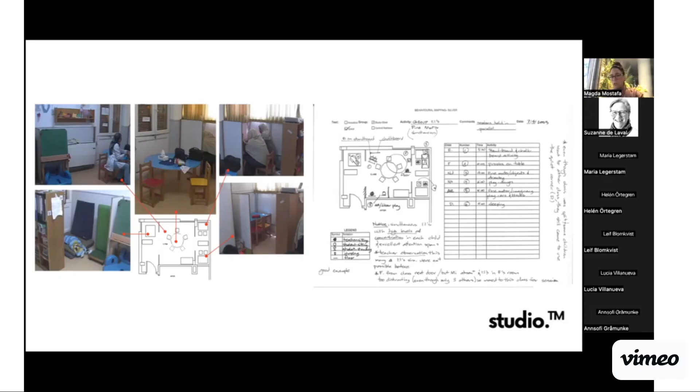And then we embarked on a year of coding their behavior in space and mapping their behavior in space in a very specific, broken-down kind of way, so that we were taking their tasks and breaking them down into vignettes of 20 minutes of observation at a time, recording their movement and the experiences that they were having throughout the classroom.

All of this was organized in what we called the sensory design matrix, which took the architectural attributes of proportion, scale, symmetry, color, lighting, acoustics, proximity, sequence—all of these ideas of architectural qualities—and tried to map them against our sensory inputs.

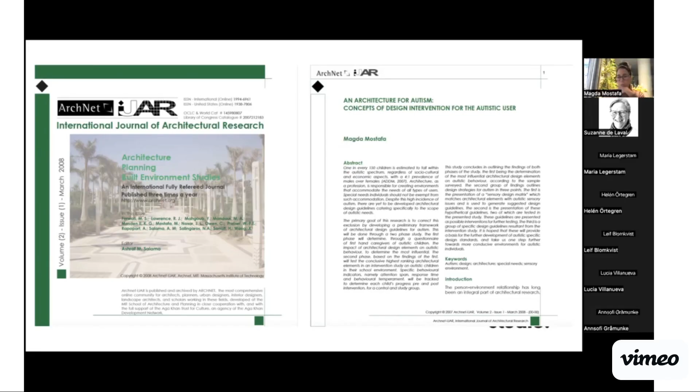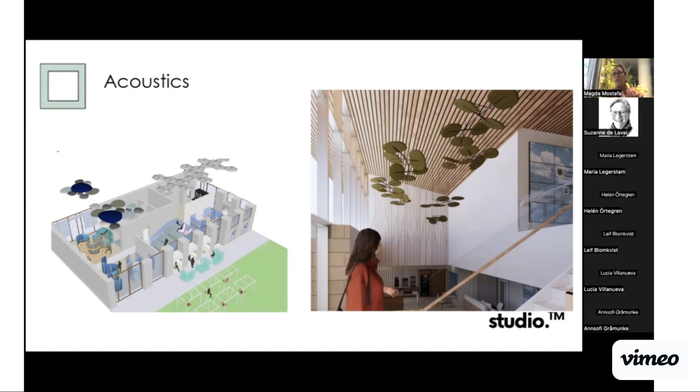One example is this image on the right, which is the lobby of a healthcare space I'm currently designing in the United States for an autism healthcare and research center. The ceiling-mounted installation above uses materials designed specifically not just to remove all sound from the space, but to allow intelligibility—masking high and low frequencies while allowing the frequency of voice. The idea is to create an environment that's intelligible, so when you enter a hospital environment, you're not overwhelmed by noise, and you're still able to hear, have conversation, and listen to instruction.

The next principle is spatial sequencing. This asks us as designers to break down and analyze the behavior and unfolding narrative of people's movement in space, thinking of it almost like a movie or story unfolding within the space. Then we design spaces and their sequence to parallel and mirror that narrative, so that as you move through the space, you're not moving abruptly through experiences, but in a sequenced, logical way aligned with how you're intended to use the space.

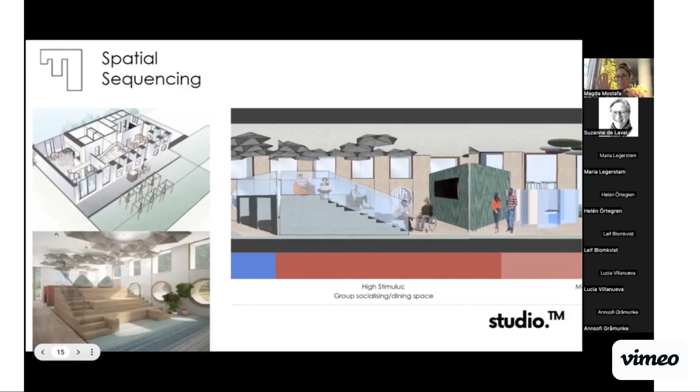That short clip I showed you is actually the spatial sequencing of an autism-friendly student center we were involved in designing at Dublin City University. I see some people on the call are from Ireland—Dublin City is the world's first designated autism-friendly university, and I had the privilege of creating a design guide for them.

This student center takes you from the central mall—it's on the ground floor of a student dorm being built there—from a mall that is very busy, loud, and overwhelming, through a transition space, into a series of spaces that mirror how students will move and experience that environment.

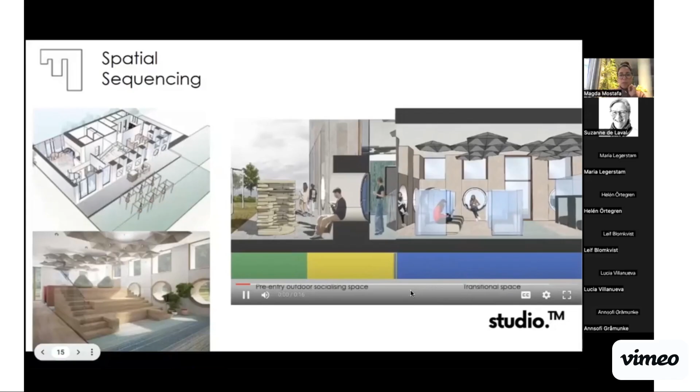The next concept in ASPECTSS is escape. I'm actually now revising that word because it may come with a negative connotation. But at the time, it was presented as a spatial opportunity to step away from a sensory overwhelming environment. I'll show you an example of what we've done with it and how we've researched its value. What I advocate for is to make sure that in all of our spaces, we allow for that experience, that moment to step away when you're overwhelmed.

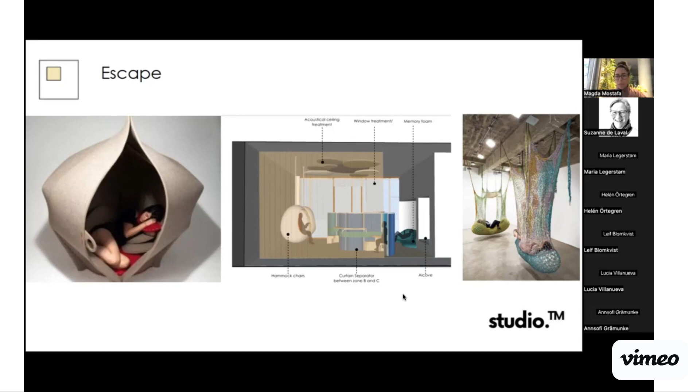And to create this spatial infrastructure for that to happen. I know we're focusing today on schools, but I'm finding this can be particularly impactful in healthcare environments, especially when embedded into wayfinding systems, because one shocking statistic is that the level of healthcare autistic individuals have access to is significantly lower than their peers, not because we don't want to care for them, but because of the lack of access to these healthcare spaces and the barriers they create.

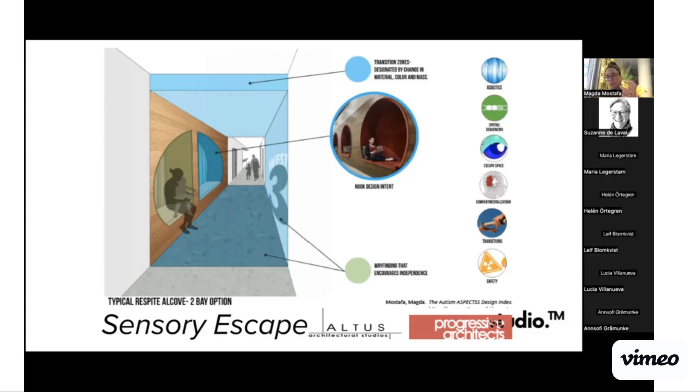One of the most important barriers research has shown us is the physical environment itself. Autistic individuals will delay care and delay a visit to a hospital because of how the physical environment of our hospitals is set up, and that delay of care will have an impact on their health. There are shocking numbers to support that claim. So one of the things I'm exploring in my work is embedding these escape spaces as part of wayfinding strategies, and the same could be applied in school environments as well.

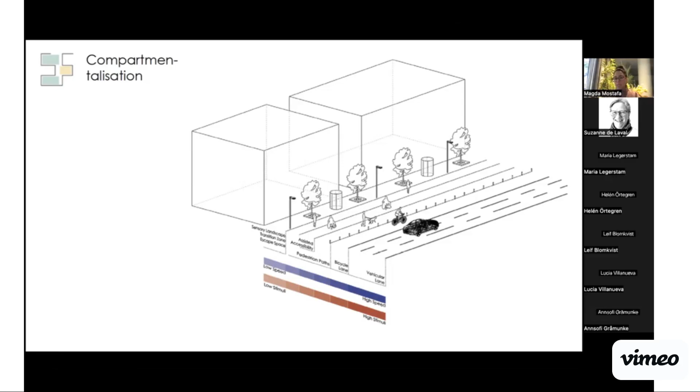The next concept is compartmentalization, which is similar to zoning in that it asks us to organize space, but into discrete compartments. Here is an example on a city street surrounding Dublin City University, with a proposal for a transition between the building line and the paving, with almost lanes of different speeds and sensory qualities in a gradient, going from low speed to high speed to mirror the low stimulus to high stimulus we see along any city street.

Compartmentalization can also be represented in the internal space of school environments. This is an image of a school for autistic students I was involved in designing at the Sharjah City for Humanitarian Services with Dar Al Omran and Mimar Group. Here we took this idea of compartmentalization even at a very small scale, so each activity—group work, one-on-one, individual work, the escape space, the teacher's workspace—had its own discrete corner or representation throughout the classroom environment, which was very important.

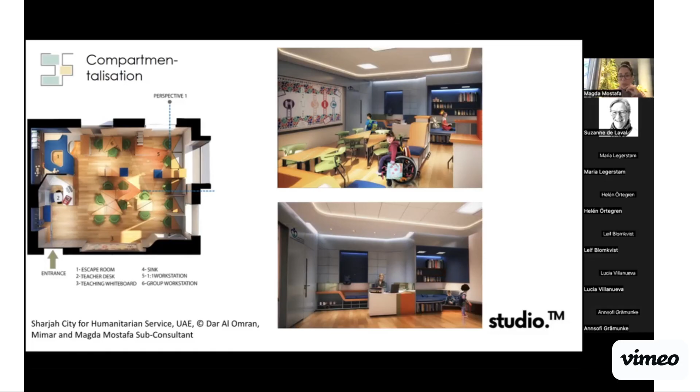The next principle is transition, which asks us to create the spatial infrastructure to allow for sensory regulation and readjustment. If you think of the autistic experience as possibly being one of constantly being bombarded with sensory input that isn't necessary for what you need to be productive in your space, then sometimes as you move from one experience to another, you're going to need a moment to adjust.

I think all of us can relate to this. When we arrive at a meeting or conference, very rushed and late, coming off a noisy train or walking through an overwhelming station, and then we have to immediately be ready to talk and converse and be brilliant in our work—sometimes you just need that moment to adjust, to go from a very sensory overwhelming experience to a very focused one. What ASPECTSS calls for is creating the spatial infrastructure for that to happen.

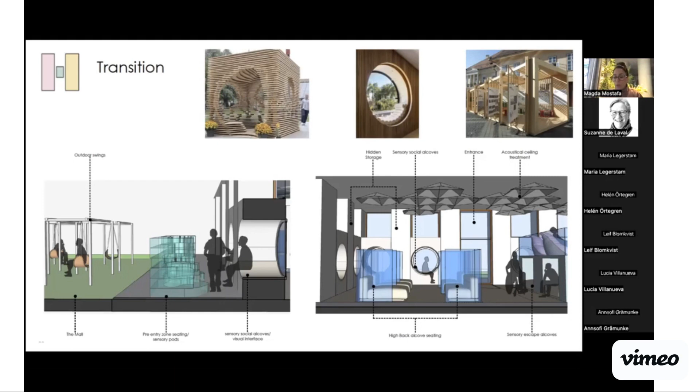It can be a small seat for someone to step away with a little bit of quiet. It can allow you to step away from the flow of people so you don't feel the burden of being in people's way and being a barrier. And it can take on very different forms.

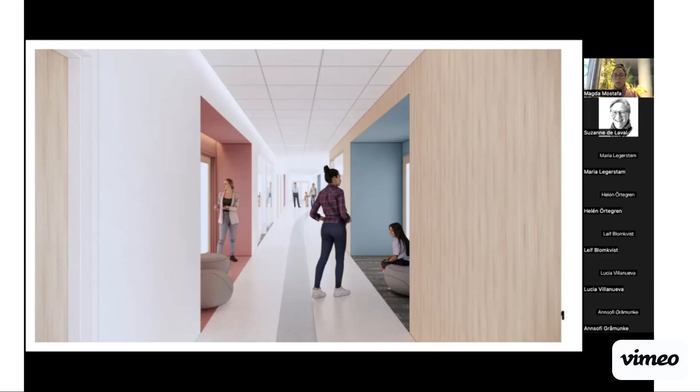This is another piece of work we did as part of a healthcare environment, but I include it here because it could just as easily be part of a school environment—creating alcoves of space where students or patients, as they move through a central corridor before their next activity, perhaps arriving from the playground and then going into a class for an exam, can have a moment to sit on a comfortable seat, with different lighting and carpeting where it's quieter, to readjust and sensory regulate before moving into that high focus, low stimulation experience. This can be tremendously helpful.

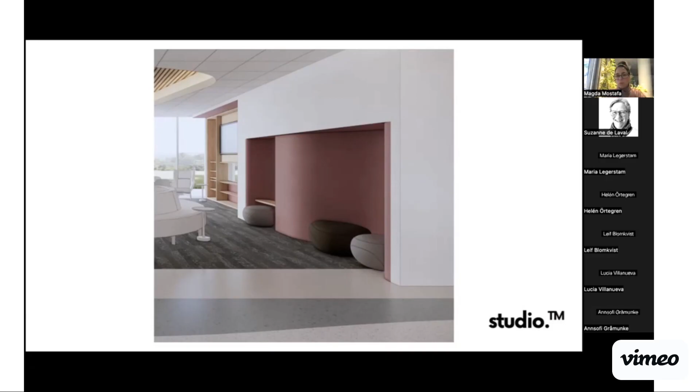And it could take on lots of different forms and colors. The next example is this idea of sensory zoning.

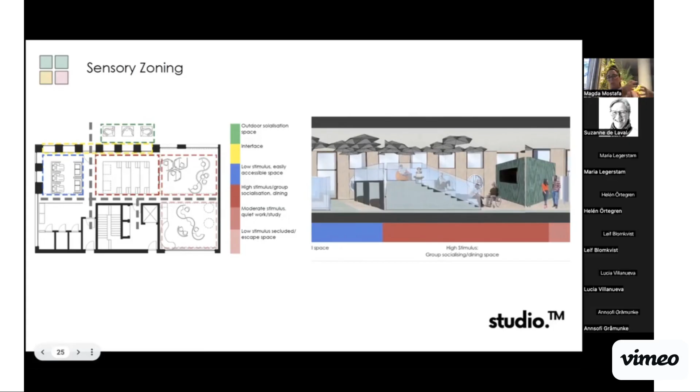Here you see the same video of the spatial sequencing, because in parallel to that spatial sequencing of movement from one activity to the next in a logical order, it must also be organized in a sensory order. Ideally, as architects, we're encouraged to think of spaces through the functional lens, doing functional zoning. I'm not asking us to abandon that utilitarian thinking, but asking us to layer on top of it an element of the sensory.

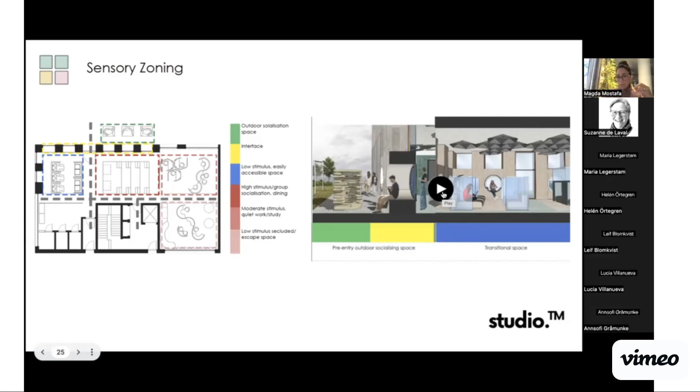Perhaps not all classrooms are the same. Some require high focus and low stimulation, while others are more engaging and stimulating, like music, drama, movement, and physical education. Those are high stimulation, while others are low stimulation. It's really important, in addition to all the other lenses of good design, to think through the lens of the sensory.

Elopement is a big challenge with some children on the spectrum. Elopement is students wanting to run away. The moment they see an open door, an open corridor, or an open sidewalk, they'll dash out very quickly, and that can be very dangerous. So the idea of safety, of course, can never be ignored.

I promised Suzanne today I would talk about the Autism Friendly University Design Guide, but the reason I present it here is because it's a really great example of how all of these principles come together in a practical and implemented way. At Dublin City University, we were invited to design a guide for them to think about their future spaces, and also to design three test cases that would take all of these principles and put them into action across the campus.

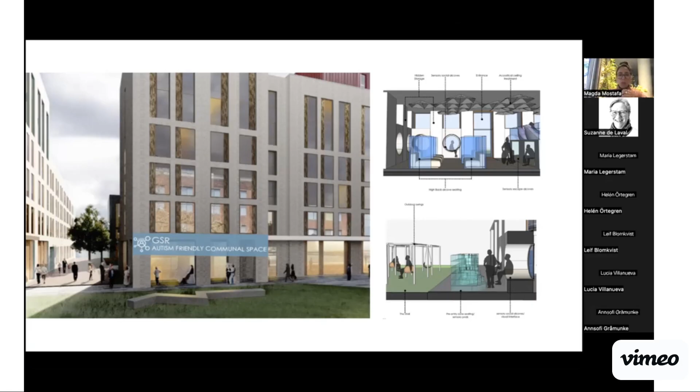One of the first things we designed was this autism-friendly communal space. The selection of where it was located is very important. A lot of us want to create autism-friendly environments within our schools, but sometimes tucking them away can be stigmatizing. So we wanted to make sure it was centrally placed on the central mall, and that it became a showcase of what an autism-friendly space looks like.

Through the transition space, you see circular cubbies in the wall, some accessible from the outside, some from the inside, as transition spaces. The first encounter after transitioning from outside to inside is this social space where students would be invited to come together, maybe have a short guest talk. The space is carpeted and has acoustical tiles above to help capture the sound.

As students move through the different zones of that autism-friendly social space, the culmination was this whole refuge sensory regulation space with hammocks, hanging chairs, and customizable moldable foam carpeting, so people could mold the shape of the space or chair into the shape of their body. It would be a place for not only autistic students, but any student to benefit from this autism-friendly design.

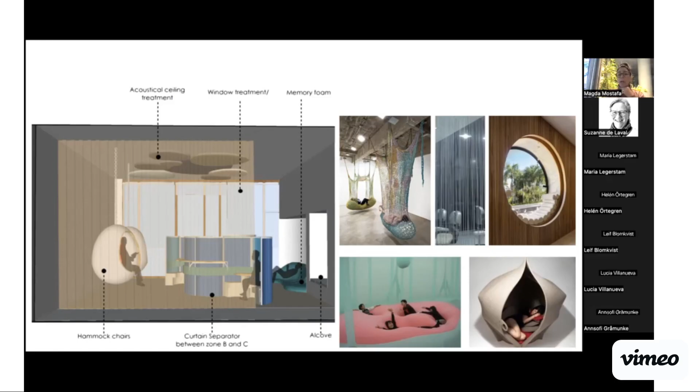Above, in the autism-friendly dorms we helped conceptualize, are a series of autism-friendly bedrooms for residential support of students on campus. Since independent living is such a challenge for students in general, but particularly for autistic students, it was important for us to make sure the dorms on campus included a series of autism-friendly bedrooms. Here is a good example of the scaling of compartmentalization.

So even though it was a tiny student room - rooms are never big - we still managed to create 4 discrete compartments: a study space, a sleep space, a storage space, and a bathroom space, all within a very small footprint.

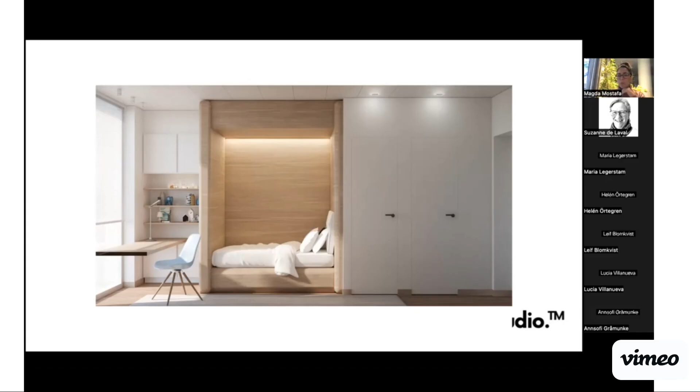We were still able to create that sense of containment in the bedroom, because you don't want the distraction of sleep when you're studying, or the distraction of studying when you're trying to sleep. With a simple compartment to break that line of sight, we felt it would help create those compartments for the students.

So that they could truly use those spaces to recharge and regenerate their needs while on campus. Another interesting thing we did at DCU was shown in this diagram. One was to create what I call an escape-scape, a network or landscape of escape spaces dotted across a campus, a city, a school, a hospital - a series of moments to allow people to escape from sensory overload. It can be just an individual chair that hugs you and wraps around you.

It can be a small bench under a tree off a pathway, hidden by some shrubs. It can take all sorts of different forms, but it's important that those escape spaces are distributed equally enough across the space, so at any time someone moving through these complex, sometimes overstimulating spaces has a moment to step away. The second tactic this diagram shows is what we call the sensory pathway, the dotted blue line weaving around the campus.

The idea of the sensory pathway was actually inspired by one of the autistic students on campus, who was kind enough to give me her insights and walk with me virtually through the campus to share her sensory experience. Her name is Milena Larsson.

She's since graduated from Dublin City University, but during her time there, working with me, she shared that she didn't use the main central spine - the main central mall that all students used to get from one point of campus to their classes - while on the main Glasnevin campus at DCU.

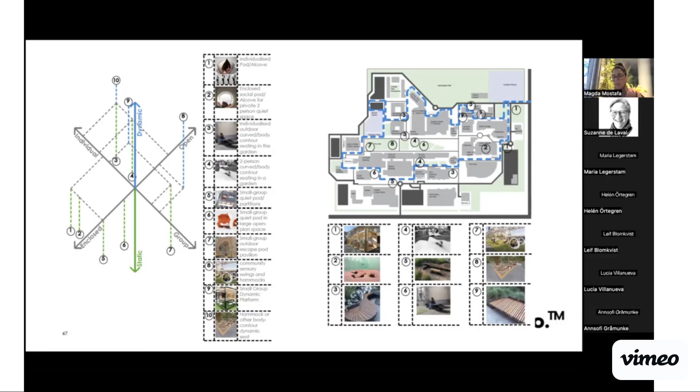So she had figured out these little pockets and shortcuts that let her move quietly and more privately between where she needed to go. We decided to embrace that and connect it across all of campus to create an entire sensory pathway.

The other tactic we proposed on campus was what we called the escape space, or quiet space, which has since been constructed. It was a small alcove in the Henry Grattan Student Center, very close to where the Autism Friendly Initiative offices are housed, so students on the spectrum were coming to this building.

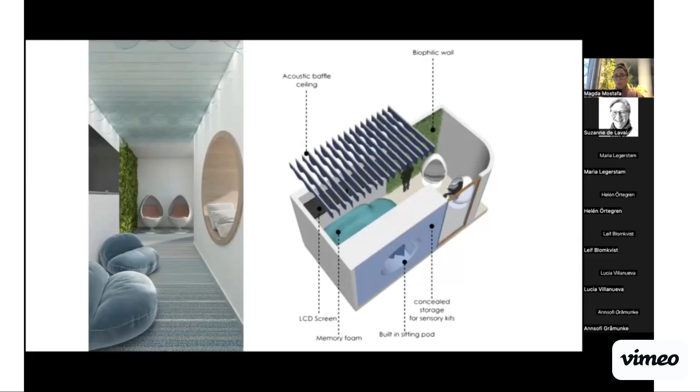We wanted to create for them a little pocket of space that was theirs, that they could escape to. It has since been built - I was just in a meeting this morning with people at DCU. We're putting together an exhibition at DCU to reflect on that work and other work I'll show shortly. But so far it's an extremely successful space that allows students to step away from the overwhelming environment of the university campus.

These types of tactics are things I use and propose in almost all the projects I do. These images are from a workshop I recently did at the ELS for Autism Foundation campus in Jupiter, Florida, which houses a charter school providing services for the autistic experience.

These were perhaps the most popular of all the images and tactics we showed them. The simple introduction of these types of alcoves throughout any space dedicated to the autistic experience can be incredibly helpful. I'm always happy to see other architects adopting the work we propose.

This is from the work of 6 Foot Studio, headed by Matthew Tabram, who created a proposal for a school in London in a similar way, embedding this idea of wayfinding and navigation along corridors, including these alcoves of escape dotted throughout the school space for self-regulation and withdrawal in a way that is very helpful.

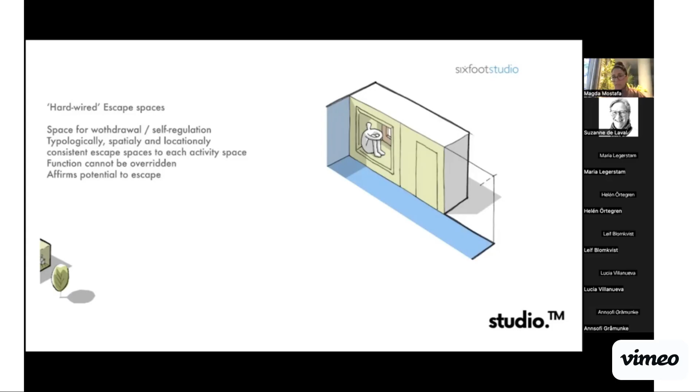Matthew and I have had conversations about how the aspects principles have informed the work he presented. Aspects is also not just a tool to design new buildings, because I know a lot of us on this call may have schools of our own that we work in or have designed, and it's too late to go back and start from scratch.

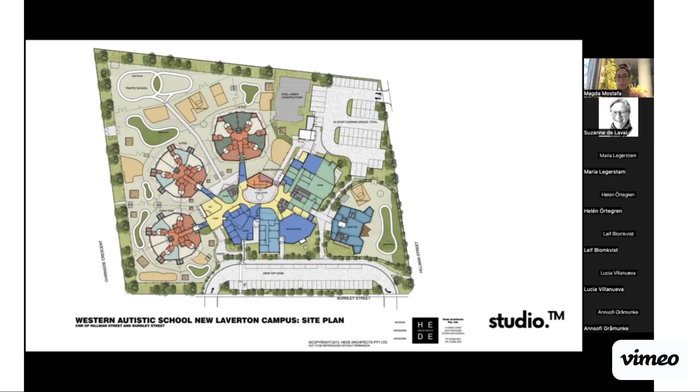So we may want to measure and assess what we've currently done in order to know how autism friendly they are. We did something like this in 2014. We looked at five schools from around the world. This is the Western Autistic School by Paul Hede and Maria Hede, architects in Australia, who also designed another wonderful school called the Northern School. We looked at these schools and assessed their autism friendliness.

We also had the opportunity to design at the Sharjah City for Humanitarian Services and look at the alignment of the wayfinding strategies there with the lighting and wayfinding tactics of aspects.

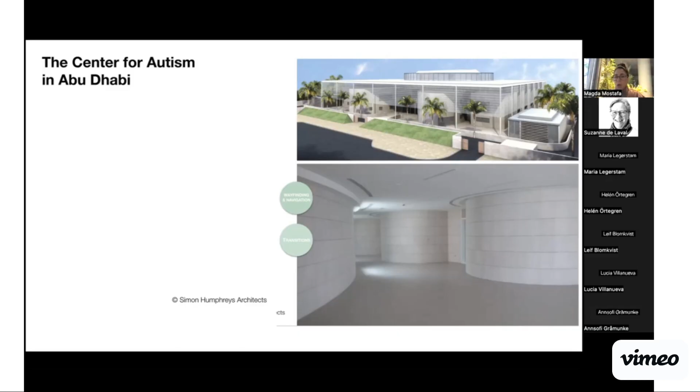This is the Center for Autism in Abu Dhabi, designed by my friend Simon Humphreys. Again, a lot of the aspects principles here were aligned in that there was a lot of transition—it's almost like a building within a building. It's a very beautiful design that protects from the harsh desert environment of Abu Dhabi: dust, wind, sand, heat. That double skin is very interesting, but it also creates these interstitial spaces of transition that's so wonderful. The wayfinding navigation and the smoothness of it and the creation of transitions really aligned with the aspects index.

This Autism Center in Missouri was designed with SFS Architecture and BSA Life Structures, and myself, Studio TM. We created a whole wayfinding system that weaves through this Autism Research Center, allowing individuals, once they enter at the point of entry and check in, to start moving through the space following what we call this stream. These visual cues on the floor allow the autistic patients to track and follow the stream to their therapy appointments.

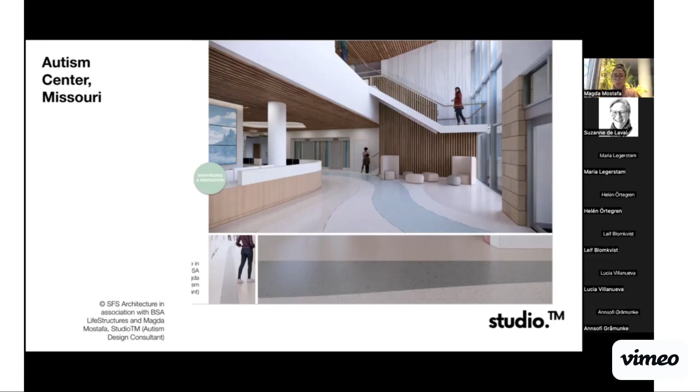This is again a tactic that can be easily employed in a school environment. You can color code it or texture code it so that students can find their way to the kindergarten, primary school, or high school, or to the gym and recreation spaces, or to the cafeteria in a way that is logical and follows a certain sequence and concept.

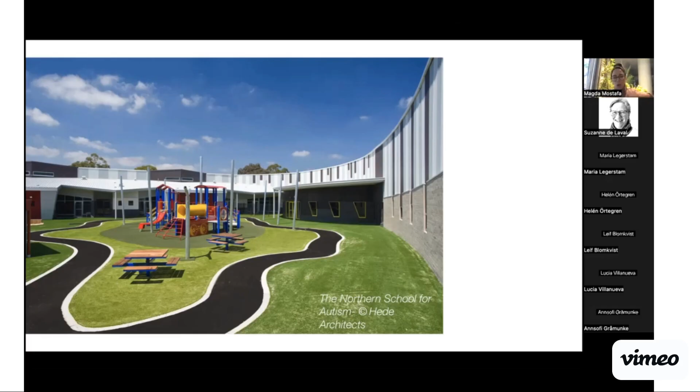This is the Northern School for Autism, again by Hede Architects. Here they use this central space that opens up onto all the classrooms to allow for that transitioning between the different sensory zones of the school in a very beautiful and effective way.

The analysis and assessment of all of these schools was summarized through a series of surveys and also a series of aspects assessments that I performed to score the schools. The objective of this research was to look at whether there is an alignment between the aspects criteria and the school participants' self-reporting of autism friendliness.

So we asked the school leadership, the parents, the teachers, and some of the students to score the autism friendliness of their school as they perceived it, and looked for alignment between that and the actual aspects criteria and level of alignment the schools were following. We found a very high correlation between those two, which was an interesting proof of concept that the aspects criteria actually do, or can, create autism friendliness in schools.

Another way that the aspects tools are being used is through post-occupancy evaluation and retrofit. Here I go back to the ELS Center for Excellence in Jupiter, Florida, that I was just visiting again a few months ago. They are a phenomenal organization, and they have on their campus an independent charter school that operates there.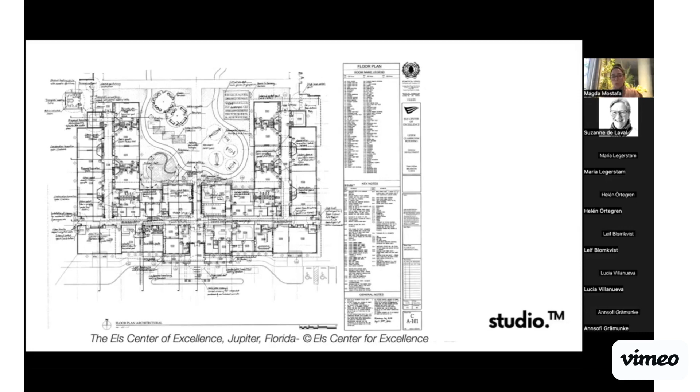I had the privilege to work with them and think about how the architectural environment built for that school could be utilized and deployed in a way that would help maximize the functionality of the school. The primary school had already been built; the high school was still under construction when I did this post-occupancy assessment.

What we did is we broke down the school environment into modules of space, looking at different spatial organizations for small group work, for individual one-on-one interventions, for alternative escape space, and for large group configurations. This produced a series of modules that teachers could then go in and, almost like a puzzle, mix and match to create the layout of their classroom.

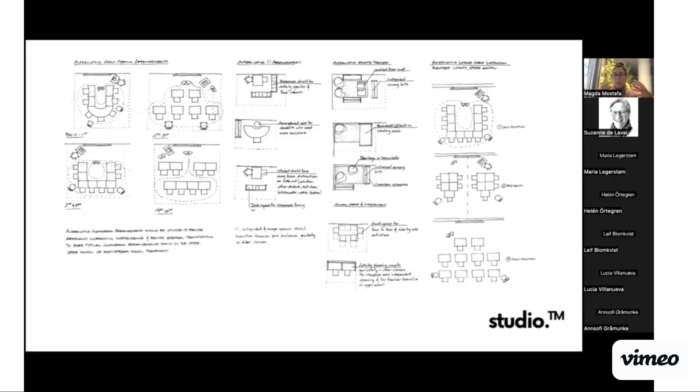So they would have a library of these modules that they could then pick and choose from and piece together to create their classroom environment, or the ideal classroom environment depending on their needs. And I generated for them a series of templates that the teachers could then draw from.

So they had a traditional stereotypical classroom layout, and certain prototypes of furniture that they already had in place. And from that library of pieces, we were able to template a series of classroom arrangements that different teachers utilized in different ways.

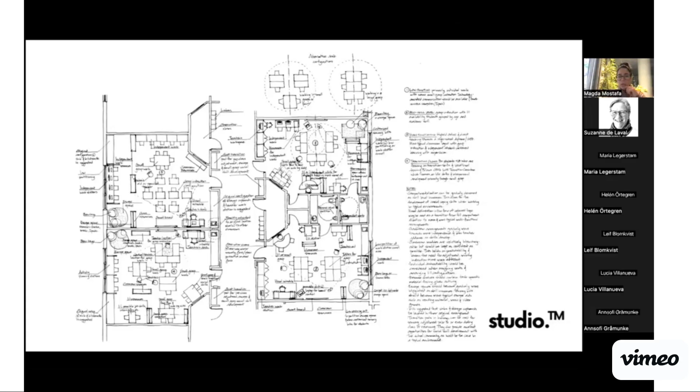We went back a year later and assessed how the teachers used them in both the primary school and the upper high school. I went back and was able to visit and assess myself, as well as through a survey, in what way complying with the modules helped the classrooms, or for the classrooms that didn't follow the modules, whether there was an impact or not.

So again, we were using a proof of concept to try to see if an ASPECTSS-compliant classroom is actually a better classroom for students' performance within it.

We also introduced a color scheme throughout the wayfinding because there were some wayfinding challenges in the school, because the school was designed in a very symmetrical way. So as you're moving through the school, you can get turned around and not be oriented to which wing of the school you're on.

So we introduced color scheming, and that color scheming has been carried out. Interestingly, on my visit back in November, I became aware that they also use it as a safety recall communication. So if there's a crisis happening in one of the school corridors, they can call over the walkie-talkie that talks to all of the teachers and staff and say, we have a student in crisis and in need in the blue corridor.

So they can immediately go to the right space. They're using this color scheming to communicate for safety concerns as well.

So in the post-occupancy, we did one post-occupancy of the existing school to propose the design interventions. The design interventions were then implemented, and we went back a year later and did a post-occupancy to see the impact of those design interventions on the school.

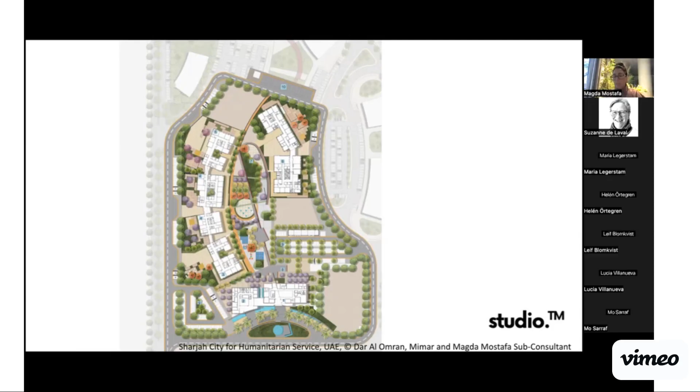And of course, the best case scenario for us is to take the ASPECTSS principles in a generative way and design a school ourselves using them. This is the Sharjah City for Humanitarian Services, the WEFA school we were involved in. SCHS is a really interesting organization, and this prospective speculative project is incredibly ambitious, an entire neighborhood of 1 million square feet of museums, hotels, and residential. It was an entire multi-use development that on its premises would include a school for autism, a school for the deaf, an inclusive library, museum, hotel, and sports complex. It was a really ambitious, beautiful project. I'll focus a little now on the autism school.

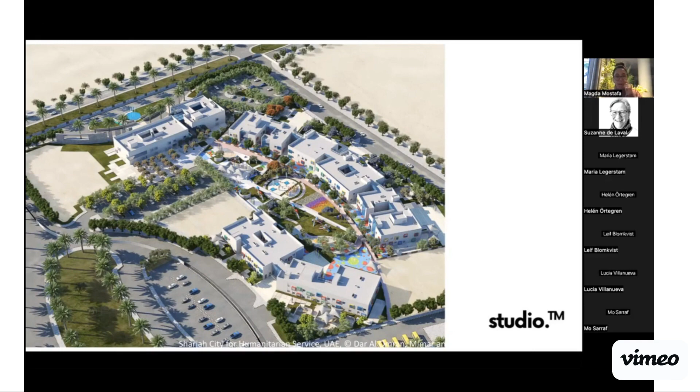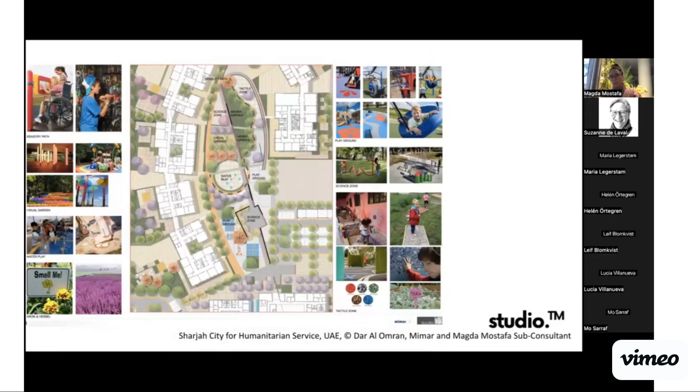In the campus of the school, central to it was this wonderful sensory playground where students could play and have different sensory experiences, but also a sensory garden where we deployed all the elements of the multisensory - a herbal garden, different textures and touch, different pathways and movements, different vestibular and proprioceptive stimulation that was so important to that experience, allowing students to transition and get that sensory input, whether sensory seeking or sensory avoiding. That sensory playground allowed for it.

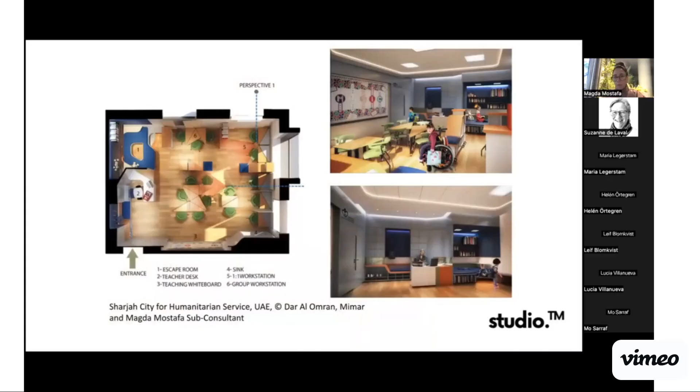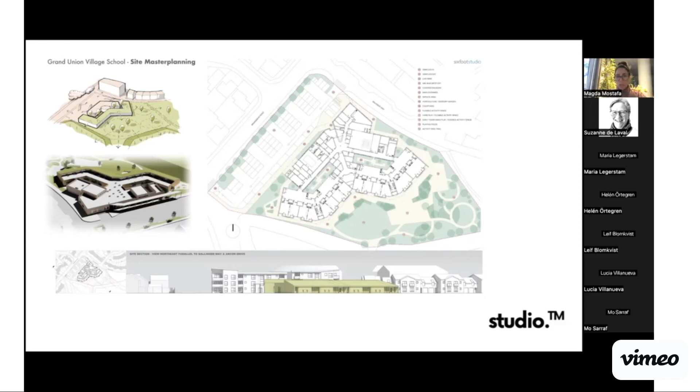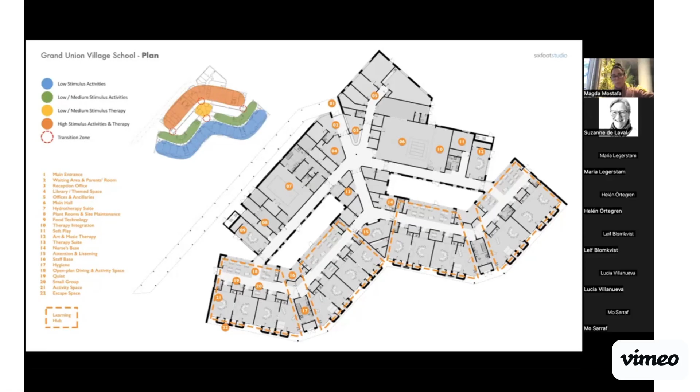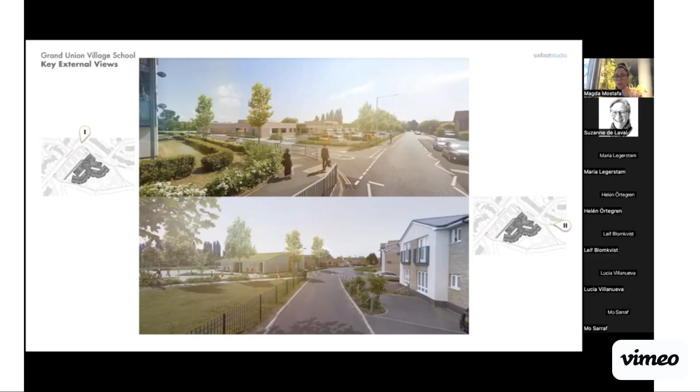The wayfinding system, again, with this idea of some sort of pathway students could follow, some integration of daylight and compartmentalization of classrooms. This goes back to Matthew Tabram's six-foot studio school, designed based on the principles of compartmentalization, of sensory zoning, of breaking spaces down rather than having big centralized, universal open plan spaces - breaking it into discrete, compartmentalized, more manageable spaces, to hardwire escape spaces as part of the overall wayfinding system, and to make sure the school was zoned in a gradient from low stimulation to high stimulation, allowing transitioning in between, sometimes through green spaces and landscape, to create that important interstitial buffer where the school meets its community.

I want to leave you with some thoughts on how we ourselves can use these different ideas. I know many architects, in our attempts to be human-centered and user-friendly, do a lot of what we call user engagement, which is incredibly helpful, supportive and inclusive. However, a lot of times the classical tools we use for user engagement can themselves be very exclusionary and not very accessible to the autistic experience, because we typically use things like design thinking visual workshops, or interviews that are very socially based, or focus groups that are very verbally based. All of those can be a challenge for individuals on the spectrum.

We worked over a series of years to develop what we ultimately call the autism-friendly design thinking approach. It began with the As I Am organization, which is an autism self-advocacy group - my Irish friends on the call may be familiar with the wonderful work that Adam Harris and his colleagues do at As I Am. We were invited to run a workshop at the As I Am International Conference in 2019, right before COVID, September 2019. We did this typical design thinking exercise, and because it was so oversubscribed, it became a very overwhelming environment for the autistic individuals in the room.

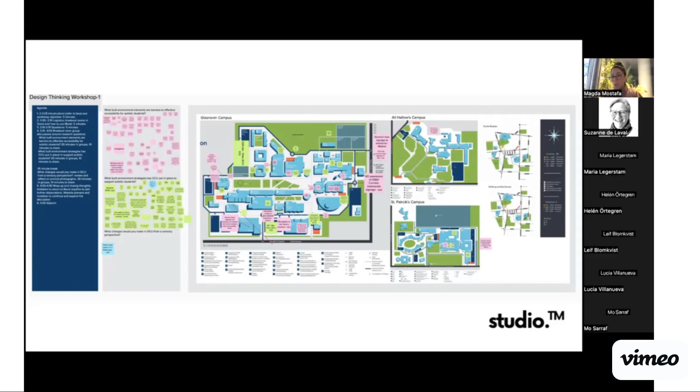So working with As I Am later on, when we worked on the autism-friendly university at Dublin City University, completely by coincidence - in a forced social experiment - we had to run a similar workshop, but now virtually, because it was during the COVID shutdown. So what we had done in Dublin originally live in person, we then did for Dublin City University as a very similar workshop, but using a mural board in a virtual environment.

Interestingly, what we found when we ran that is that immediately those who had participated in the in-person workshop and those who had participated in the remote workshop came to me and told me they far preferred the remote version, because they could zoom in and focus on a single place or space. They could edit out all the visual environment and focus perhaps only on one thing. The timing of it - they weren't under stress being asked to come up with an idea to put on the wall immediately in the moment. They could go back to our virtual board later and add more thoughts.

They could choose different ways to communicate to us. They could raise their hand in the Zoom and communicate like I am right now, visually and verbally on the screen. They could turn their camera off. They could mute themselves. They could lower the volume of people if the people were yelling or the sound was too loud. They could write something in the chat, or put it on the mural board. And even on the mural board, they could choose to sketch something, or type something on the sticky note. It was so diverse in the ways they could choose to engage that it was far more successful.

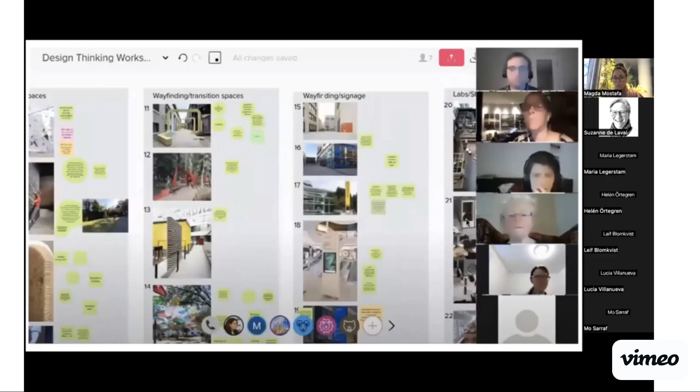I've since gone back and done many other different types of engagements with different people, but the ultimate result of all of that is this design thinking autistic perspective - being able to create predictability, being able to create something that's very scheduled, making sure there is what I call the autistic social space, so that individuals on the spectrum who are part of your workshop feel comfortable engaging in a way that they have control, that it's more personal as opposed to social.

So maybe there are some individuals where you have to do an independent one-on-one or a smaller focused group rather than a big social workshop, just to customize the experience so that you make sure that the individuals on the spectrum are truly included.

I think this work that the field is seeing around human-centered design thinking needs to have a neurodiverse lens, because when we say we are being human-centered as architects, I'm finding that largely what people actually mean is they have a very defined identity and profile of who that body is at the center of that circle. It is largely able-bodied, neurotypical, seeing, hearing, moving, male, 6'2", English speaking. There's a lot of assumptions we make about this body in the center of human-centered, and very rarely is that description autistic or neurodivergent.